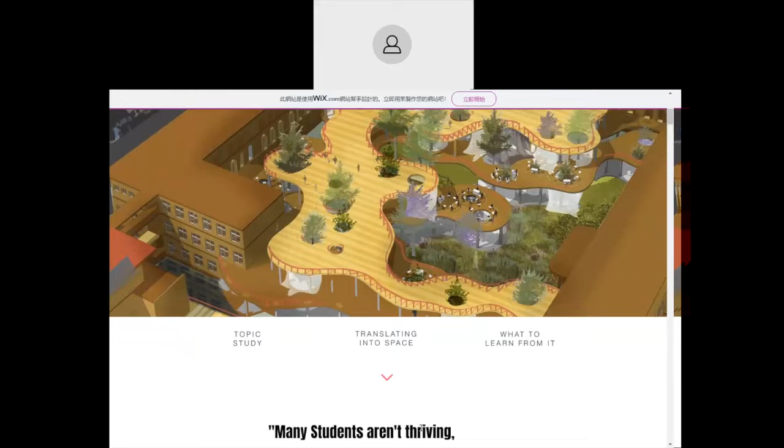So what I'm going to do is transform a 100-year-old elementary school into a flexible use of space. Today I'm going to cover this in three different aspects: the topic study, how I really created that into a space, and a simple reflection on what we might learn from this study.

Originally, my thesis was actually about discovering the relationship between a public and a personal sphere, especially in Taiwan and a culture of collectivism. We focus on unity more than individuals, and this also applies when it comes to spaces. So I thought the issue of the pandemic really presents a chance and a possibility to rethink about how we use our spaces, especially in the public sphere.

During that topic study, my professor Brian suggested I read this paper by Habermas, The Structural Transformation of the Public Sphere. Here I quote from the study: Habermas contends that it is not class that binds participants of the public sphere, but instead a mutual will. This really reflected upon my thesis, that perhaps by separating people through social distancing, I am not necessarily destroying a public sphere. A public sphere could have different forms that may not look the way we have right now.

I went into other studies that provided my design guidelines, here is a series of BBC references. Instead of really separating each child with strict social distancing, it would be a lot more practical and reasonable to group them into smaller groups and limit the people they can actually encounter during the day. Another part is enabling the campus to be zoned into certain areas instead of opening the whole campus.

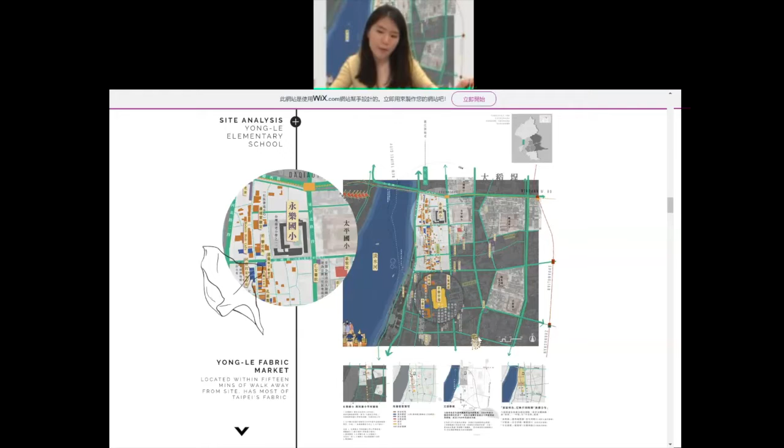Here's my site analysis. Yongle Elementary School is located at Dadaocheng, famous for Old Town Taipei and the Yongle Market for importing and exporting fabrics, in which fabric will stand as a crucial part in my design. Most elementary schools in Taiwan face a decrease in childbirth, which people see as a crisis, but it really provides a chance to release more space to each student.

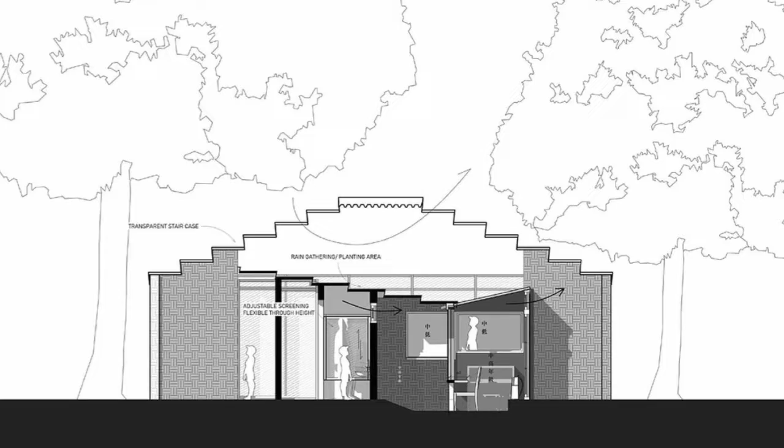Moving on into my first proposal, quite directly, you think of marginalizing the classrooms. You build these fast, safety-house-like classrooms for the students, but it didn't work. The reason it didn't work is that if these safety houses as classrooms were meant to keep students isolated, why don't we just stay at home?

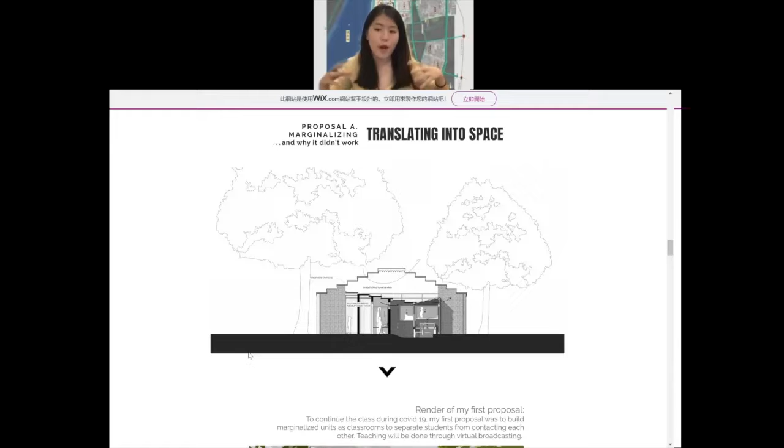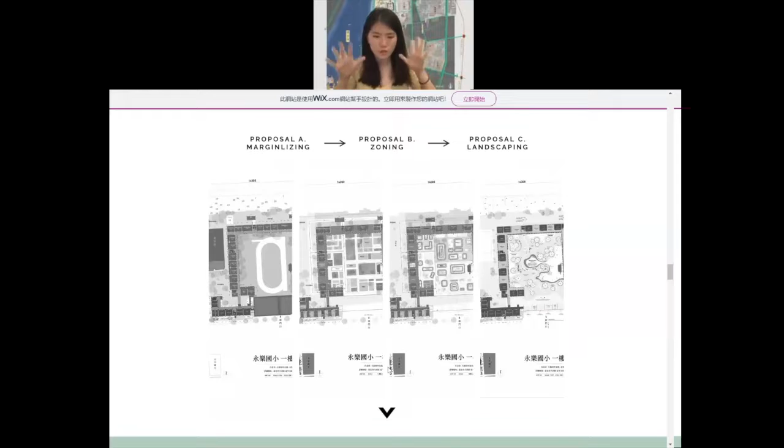If we're going to school, the purpose is really to see your classmates, to socialize. If we just want to learn, there are tons of ways to learn online. Therefore, my proposal is that if we're really pulling people back into school under lighter pandemic circumstances, we should allow them to see each other, but limit the number of people they see.

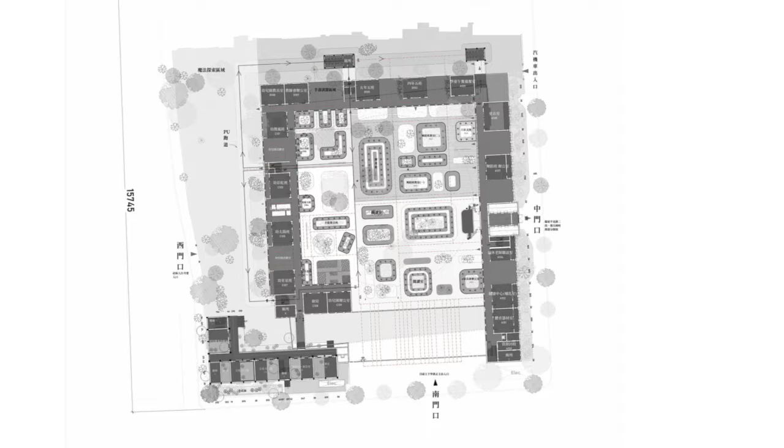Here's a transformation of my floor plan. This one was the original, and then I went into zoning so there are different sections and areas that could be used. I then softened the edges because the zoning version seemed too controlling in a way. The last step was to bring the landscaping inside, so that an elementary school could have a more gardening, open, relaxing language of grammar.

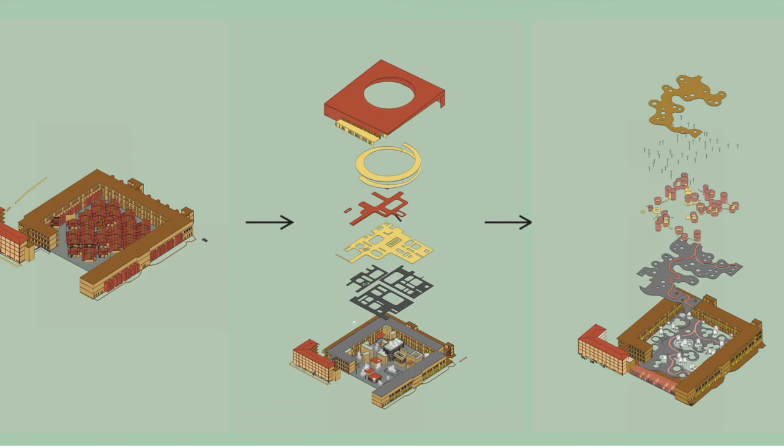Here's a diagram of my Plan A, Plan B, and Plan C. The original one was marginalizing into little cells. The second was zoning, and eventually it evolved into a landscaping, gardening approach.

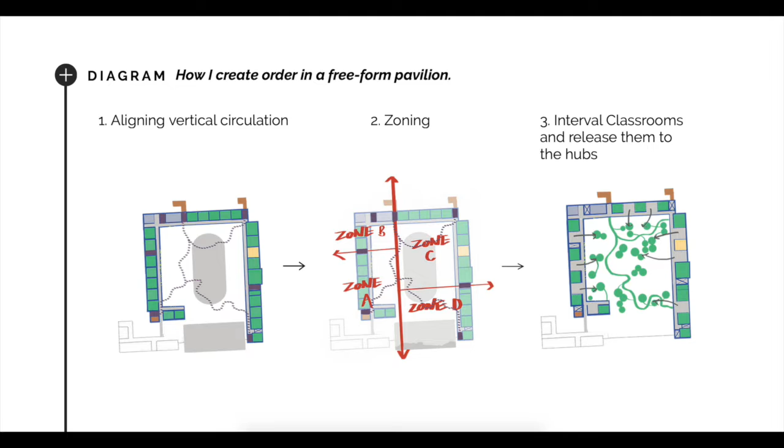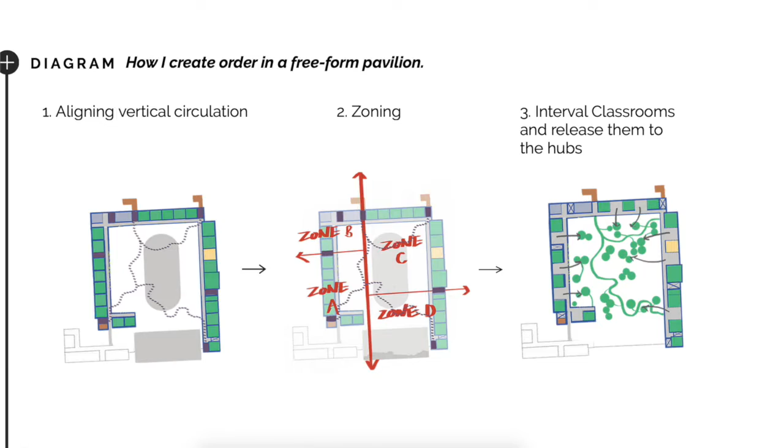Now I'll explain how I created my floor plan and how I set an order within these free-form concrete slabs. First, I aligned all the vertical circulations, meaning staircases and everything—the purple areas here are the vertical circulations. I aligned them to create my zoning areas, resulting in four zoning areas. Eventually, the classrooms here were connected. I chose to knock off one and keep one, knock off one and keep one, to create more distance between each classroom. Eventually, it ends up like this.

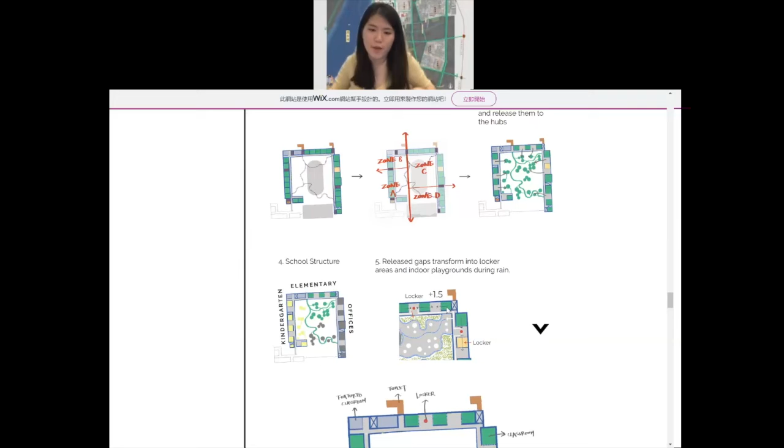The school structure originally has kindergarten on its west wing, and mostly faculty offices on the east wing. So really what I did, exploding the program of this project, I actually followed the original idea of it. Within that, these vacant spaces now provided two other classrooms for 1.5% more space use. Plus, I knocked down the side walls to create a more transparent view, so the whole school, from being very concealed, now is open.

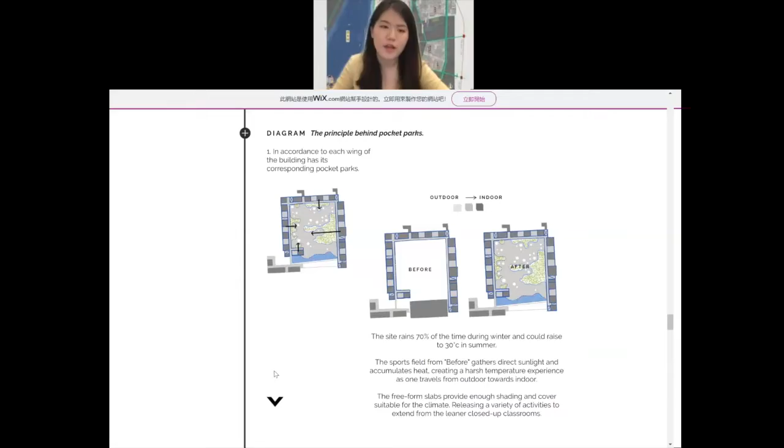A little principle behind how I design all my gardenings: I grew everything upon the east, north, and west wing so that every wing could be used singly. Also, it has its own outdoor area.

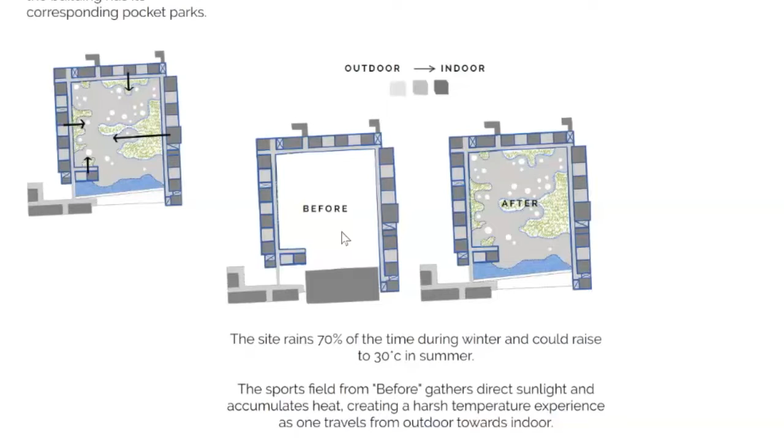From before, we can see the original sports field had this very plain concrete slab, which we know Taipei rains 70% of the time, especially during winter, and during summer it gets to 30 degrees. What it provided before was a very hot and harsh temperature experience for people.

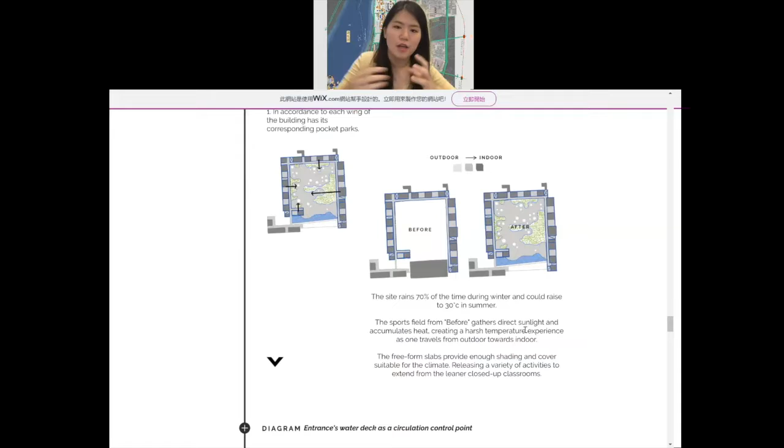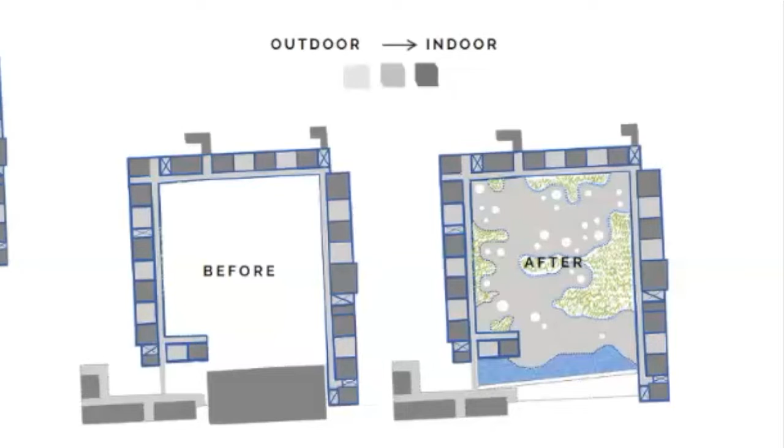A moment ago, I was on the outside on the sports field, and then I go indoors. That transfer is violent. But in the after, I really created the whole school as if it's a big pavilion and a garden, so that not only is it environmentally more friendly, but also an experience. It would have been a lot more comfortable place to go through.

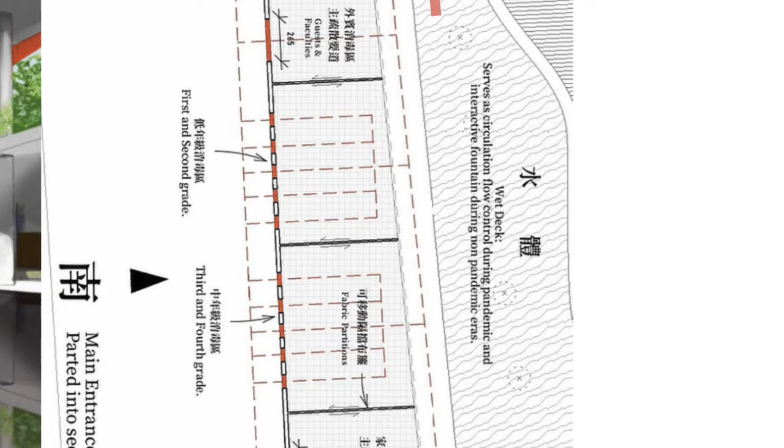Here's an entrance of my design. In response to social distancing, I created a linear entrance, so kindergarten could enter through the zone, walking through the pass. I purposely set a water deck between my floor plan and my entrance as a separation, because if I just deconstructed the whole program, it would have been very difficult to do security control points.

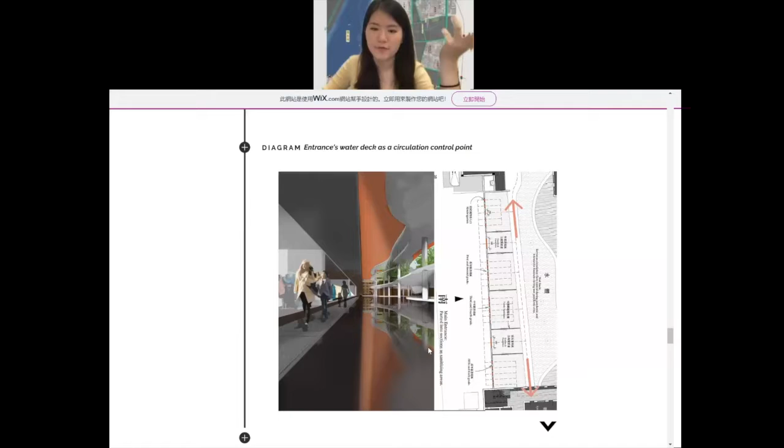By using this water deck and all my vertical circulations as security points, as organic or as crazy freeform as my floor plans may be, people using this architecture all have to eventually go through the security points I've set for them. They couldn't just run in and wander everywhere.

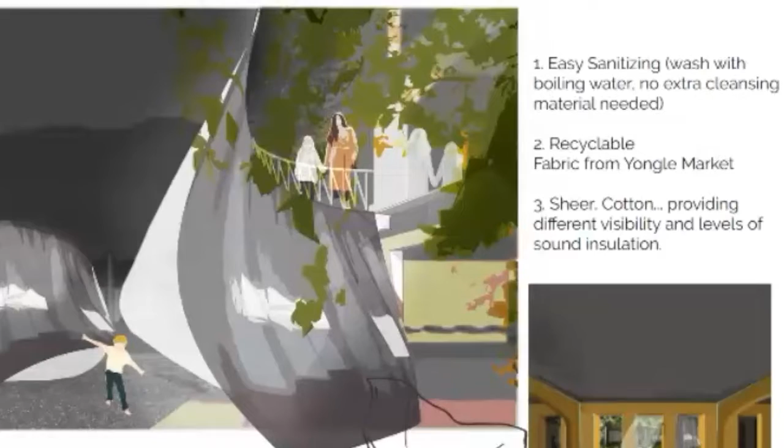But if I use fabric as my partition, there are different layers of fabric - sheer ones, thicker ones. Fabric has also been used as a sound insulation. It may seem like the open space might create chaos, but it works because you can wash the fabric. They're recyclable - if the pandemic cools down, we can all reuse these fabrics in a variety of places.

Another point here I did is breaking down the school gathering places. Originally on campus, we would have designed an auditorium, or in the sports field, the whole school gathers together. But what I really did here, I knocked one of the classrooms off and created a space in between. This is what the space in between would have looked like.

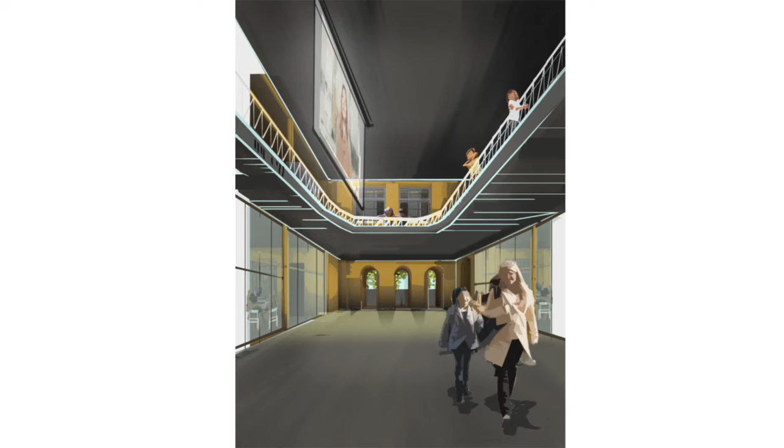So you can see the partitions here originally were sealed. Now they can go through and kids could just go near here. So this is like creating a semi-outdoor walkway of this area.

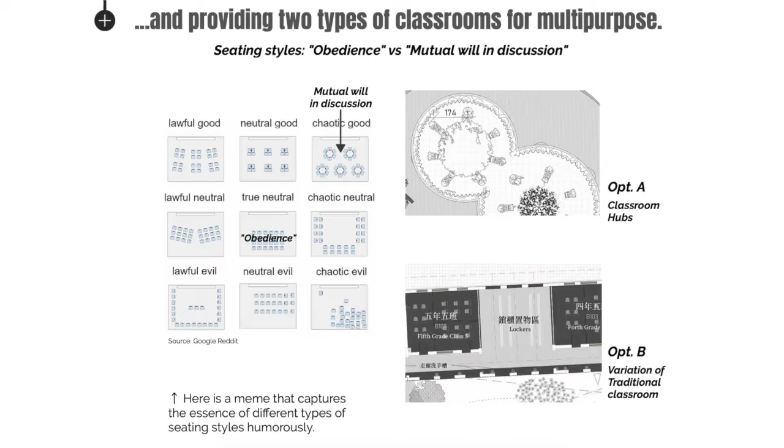I provided basically two types of classrooms for multi-purpose. Option A, which is my little hub, around 6 people will be in each hub. Option B will be a variation of the traditional classroom, because in Taipei we rain a lot, so I believe it's still necessary to provide certain secure or stable spaces for them. Here is a section detail.

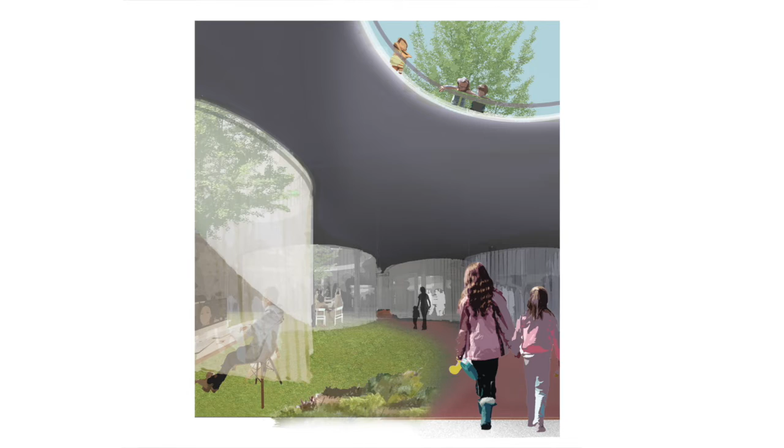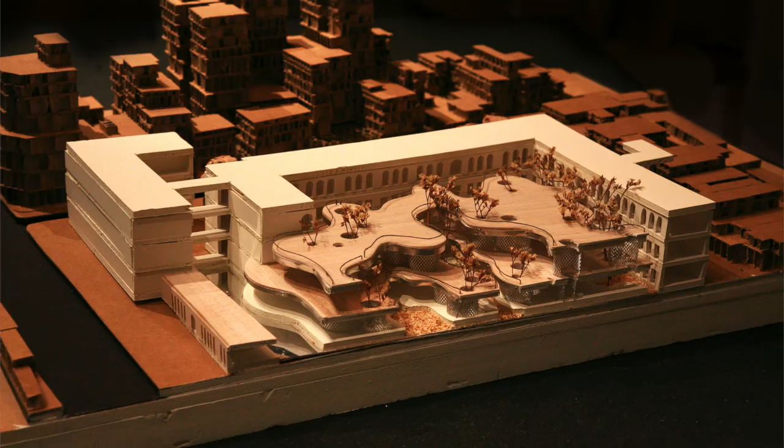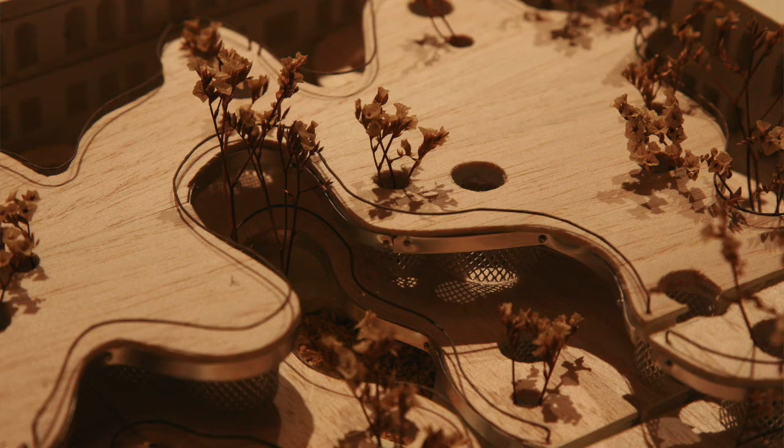Above all, a reflection - this is eventually what it would have looked like inside these gardening and beautiful pavilion classroom hubs. I think my thesis's purpose is really to bring up a discussion upon the dilemma between a public and a private sphere. My design sees COVID-19 not only as devastation, but also as an opportunity to re-examine the necessity of our traditional totalitarian spaces left by Japanese colonialism, and thus aim to transform these spaces into a flexible use of space. May our spaces be transformed.

May our education also be transformed from authority being the truth. Now truth is becoming the authority.